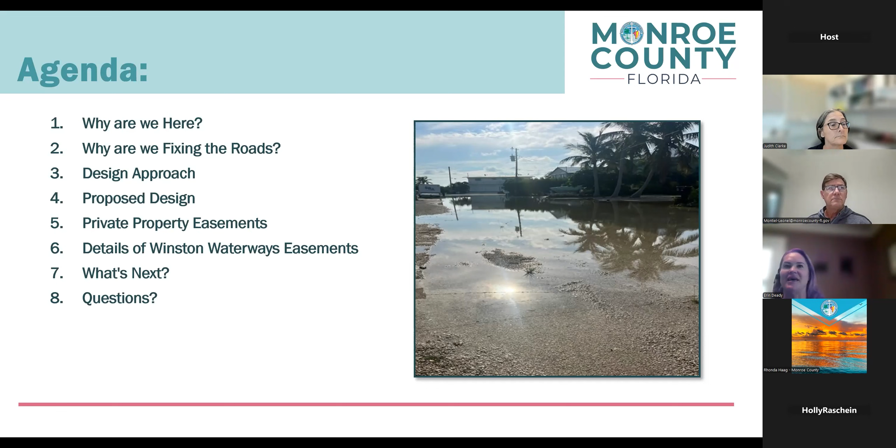We're going to provide a recap for those who attended our meeting in February, or if you did not, you'll get enough project information to have a basic understanding of what this road elevation project is about. We're going to discuss why we are fixing the roads in Monroe County, the design approach, and the proposed design for this project. We're going to discuss private property easements as applied to this project for the Winston Waterways road elevation, then what's next, and take your questions.

So why are we here? We know we're seeing different types of flooding impact different areas of the Keys. From a surface level standpoint, we're seeing more tidal flooding from increasing sea level rise, usually more pronounced in the fall, October, November, December, when we have higher high tides. We're also seeing increased groundwater, which is diminishing our ability to effectively drain the roads with the existing drainage systems based on gravity. So we are designing these road elevation projects to address these realities, the loss of drainage from groundwater and the increased surface water inundation on the roads.

The county has also secured federal and state funding to address these issues and pay for a significant part of the upfront capital cost of construction. The easements we're going to discuss this evening are necessary to get the permits to implement these projects.

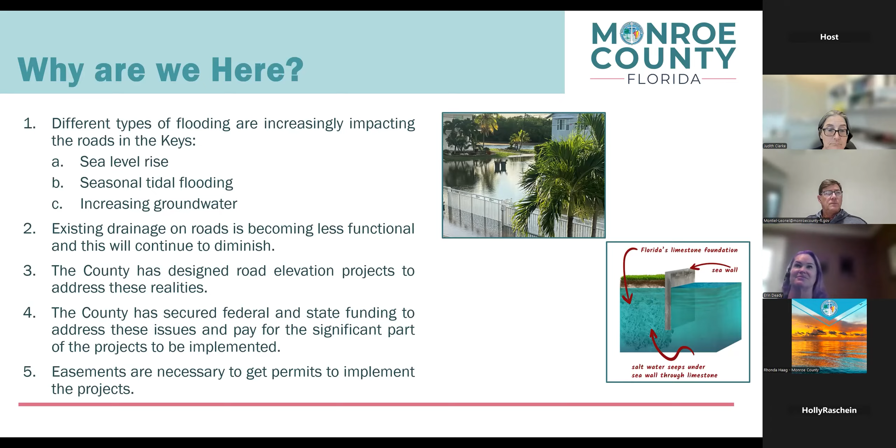So why are we fixing the roads? Monroe County has been at this for a while, developing and designing road elevation projects for certain key areas throughout the county to make the community more resilient to current and future flooding impacts that you're going to see more of over time. We're trying to proactively address those future flood risks while addressing the current flood risks and issues you're seeing now. These will worsen over time as we see increased tidal inundation and increased groundwater levels.

The benefit is that these projects will preserve access to your homes over the long term, increase the value of the homes and the desirability of the community to live there because you can get in and out with drier roads, and address the level of funding we've secured, over $51.5 million combined federal and state dollars. That money is likely not going to be available in the future, so we have to meet certain grant and permitting timelines and milestones to secure those dollars to begin construction of the project.

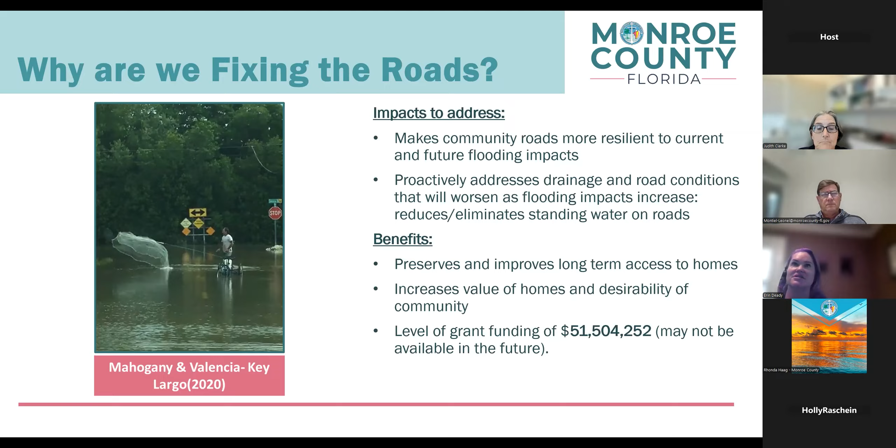I'm going to turn it over to my colleague now, Juliana, to talk about the design approach for the road elevation project and the drainage system.

All right, thank you, Erin. So Erin already went over the impacts we're seeing from sea level rise in your community. Now, to address sea level rise, the recommended solution is to elevate the roads to meet a minimum elevation of 2.26 NAVD. That elevation came from the 2045 projection directly from the vulnerability study Erin already mentioned. 17 roads amongst this community were identified.

As we raise the roads, we need to make sure we provide a smooth connection from the new elevated road to your homes and driveways. The process of connecting the elevated roads to the existing properties is called harmonization. When we design a project like this, we need to make sure we meet stormwater regulations.

One of the key regulations required in this project from South Florida Water Management District is that as we raise the road, we do not cause adverse impacts to the properties. Therefore, just raising the roads alone is not sufficient. That needs to be implemented along with a new drainage system. One cannot work without the other.

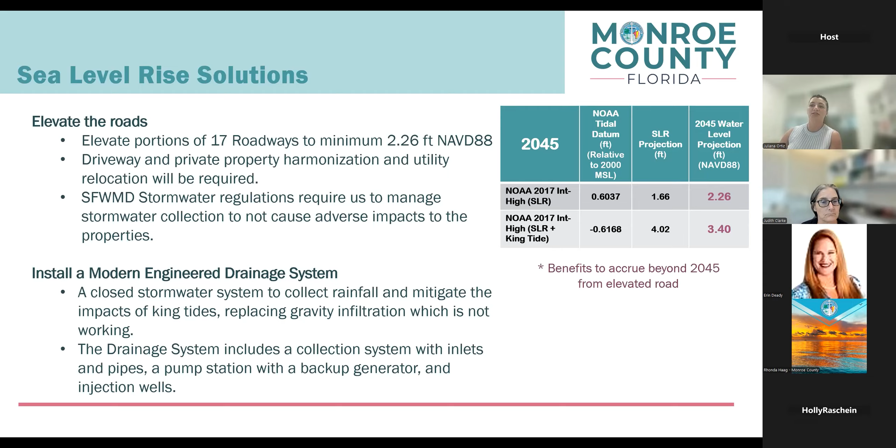The proposed design of this project: what you see here is a project layout. Here you see all the roads being impacted by the project. The map has been color-coded based on the elevation adjustment from the proposed 2.26 elevation previously discussed. The difference between that elevation and the existing elevation is why you see the different colors.

Red indicates the lowest lying areas, where the road will be raised higher than a foot—these are the areas with the greatest elevation difference. As we go down, orange shows elevation adjustments between half a foot to a foot, and yellow shows areas where the elevation change is between 0.01 and half a foot.

The areas in green are elevations that are already higher than the minimum required elevation, but were included to maintain connectivity to the drainage system. The blue square you see along Tamarind Road on the north side is where the pump station will be located.

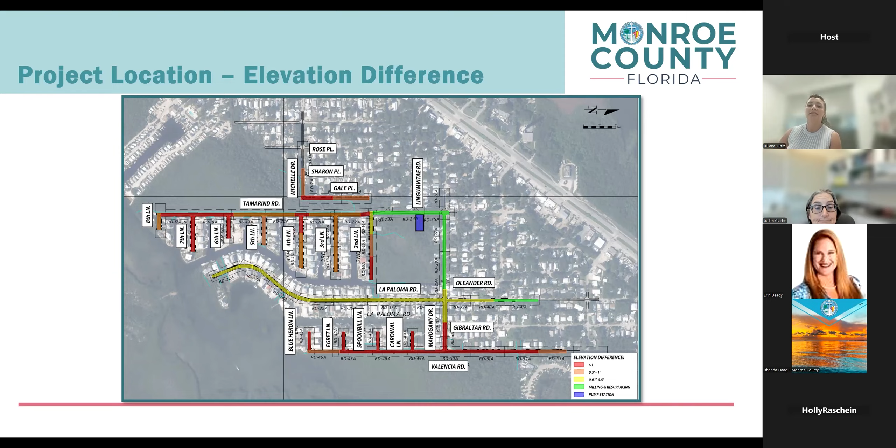The areas we will be talking about today are all part of the red areas approaching Valencia Road. That means these are areas that are currently very low in elevation.

Now I'm going to go over a plan and profile view. What you see here on top is a view of the road, specifically Spoonbill Lane, from above. All of the roads connecting to Valencia look very similar to this. The bottom view shows us the elevation difference, or the profile view—what you see in orange is the existing elevation, and what you see in blue is the new proposed road elevation.

As we get closer to Valencia, we're going to be raising the road close to 22 inches. That means that as we raise the road, we'll need to harmonize or connect to the existing properties. The two boxes you see in blue are areas where, as we connect down to the existing grade, we'll have to place some inlets.

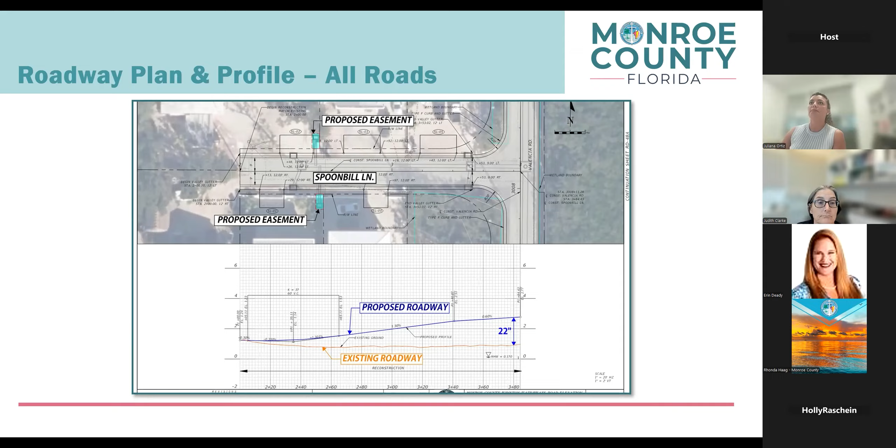This is a typical section of the roads I previously discussed that connect to Valencia Road. On all of these roads, you'll see valley gutter installed on both sides. The lanes we're providing will meet the criteria, requiring a 9-foot lane width. We're going to raise to meet the elevation of 2.26, and the stormwater will be collected within the right-of-way through the valley gutters, directed to inlets, and placed at low points.

I also want to point out that as we raise the road, we'll need to connect that proposed elevated road to the existing properties.

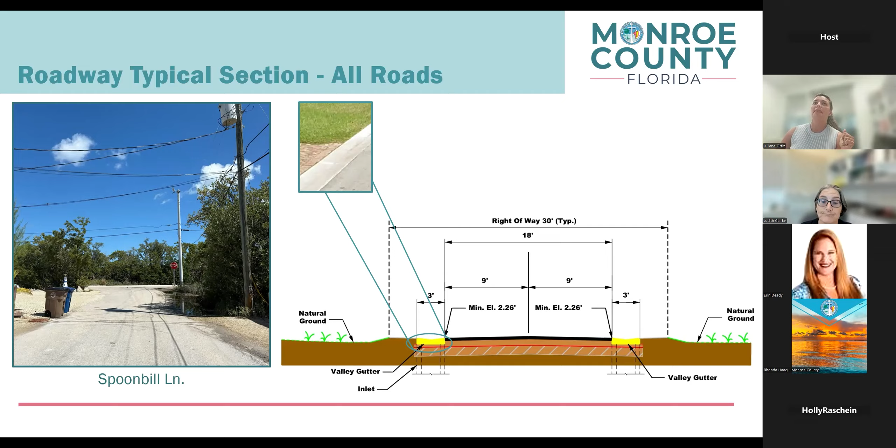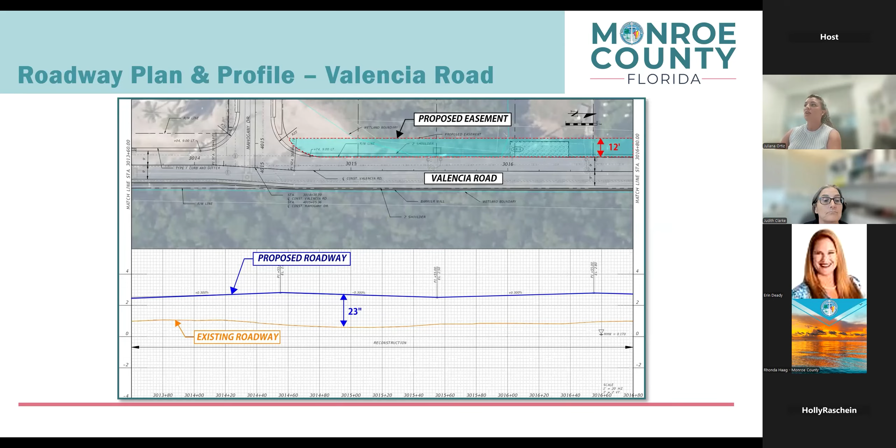This second typical section, or the second area we'll be talking about tonight, is on Valencia Road, specifically north of Mahogany. In this area we have a very skinny road—meaning the right-of-way or available space to construct varies between 15 and 20 feet. This is also one of the roads with the most significant elevation difference, about 23 inches.

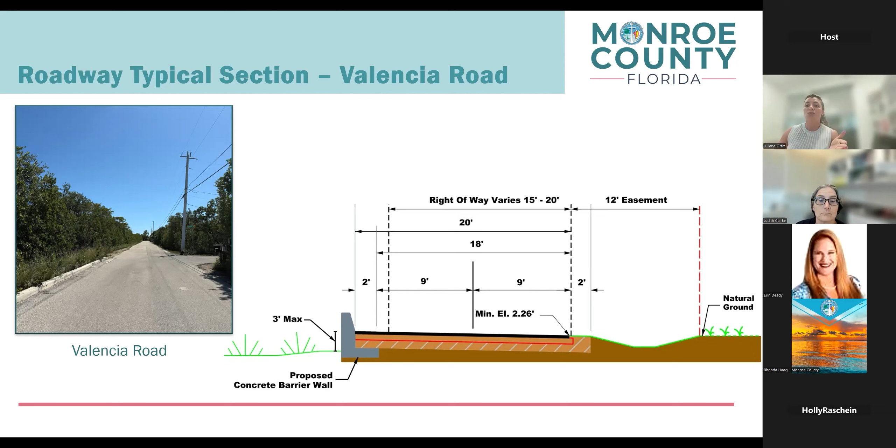I did mention that the right-of-way along this road is 15 to 20 feet. That means that in order to build the proposed improvements—not only the wider road but also the swale—we're going to need a 12-foot easement along that area.

Now I'm going to hand it over to Greg, who will talk about the stormwater management system. As Juliana mentioned, as we raise the roadway, we'll be adding an engineered stormwater management system throughout your community. The system's intended purpose is to collect rainfall runoff, but it will also help mitigate some king tide impacts as we move forward with the project. In this layout, the yellow lines are the gravity pipes that will be placed along the roadways, along with the pump station.

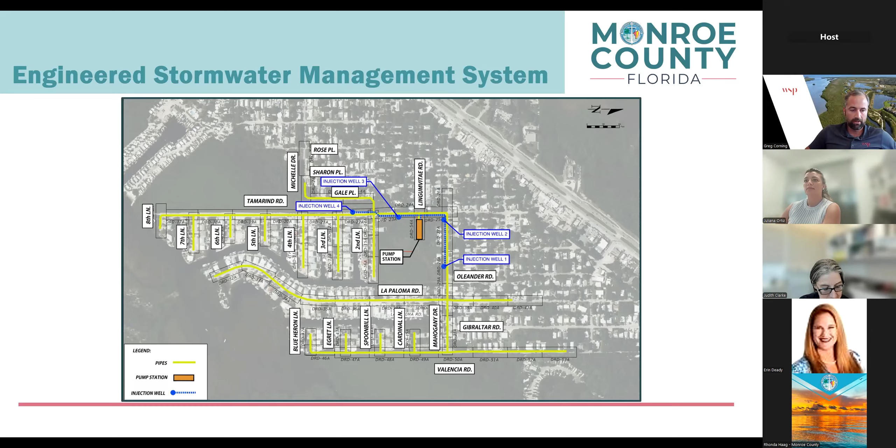If we go to the next slide, we're going to show you a plan and profile of that situation. Juliana talked to you about the roadway and the roadway inlets that are associated with it. That gravity pipe that I showed you in yellow is there in the center of the roadway. And then we have those property inlets.

That's really the conversation that we're talking about here tonight, which is the easements. The necessary portion of these easements are to ensure that we're not causing adverse impacts to your properties with the construction of this elevated road.

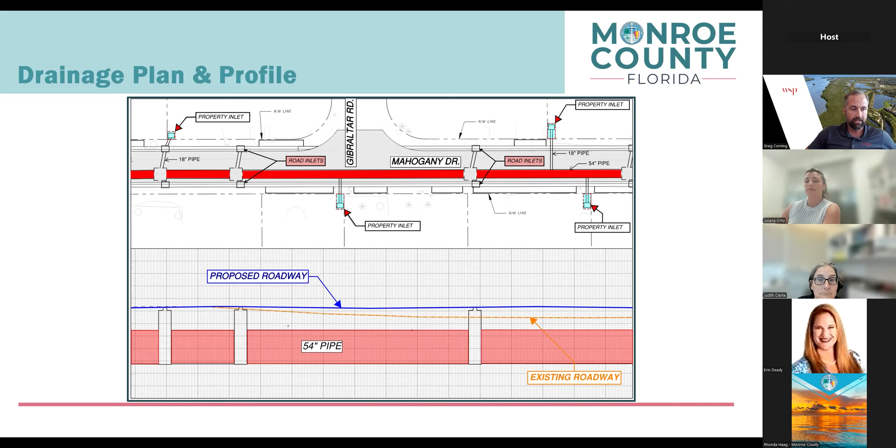If you go to the next slide, it's gonna help explain that situation. So if you see the green line, that's existing conditions, kind of what is happening today. You can see that some of the flows from your private properties are moving towards the center, which is the low point of the current roadway system. We should note that that is obviously not up to county standards, not meeting state regulations.

So as we now move forward into developing this project and elevating the road to mitigate the king tide and sea level rise impacts, we still have to account for flow that was coming from your private properties in order to not cause an adverse impact to your specific property. So that's the implementation of those inlets.

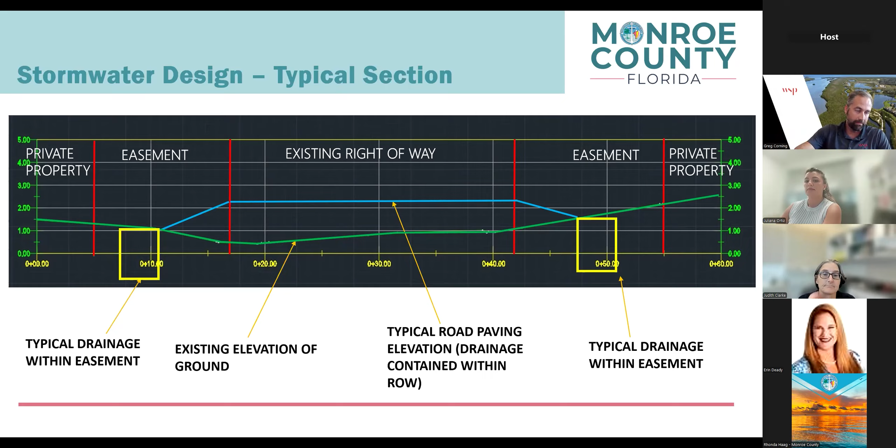And it's very important to note that that is a state regulatory requirement, not a requirement that comes from the county. It's saying that we cannot cause any additional flooding on your property as it is today as we implement the project tomorrow.

If you go to the next slide, we're going to talk a little bit more about those specific regulations and some of the details that we have to develop to ensure that we are meeting the South Florida Water Management District's permit in order to construct the project.

So when we develop the project, we develop two different models. We develop a pre-developed condition model, basically what's happening today, and then a post-condition model simulating what we're going to implement with that elevated roadway. And then we take into account all the different types of scenarios.

So we look at that groundwater table condition that Erin was talking about. We look at the rainfall runoff and the different storm events. All of those things get put into place so as to make sure that we're not causing any adverse impacts to your properties. Therefore, we had to implement the location of these specific inlets in your private properties, also with the swale along Valencia Road, to ensure that we're not causing those adverse impacts.

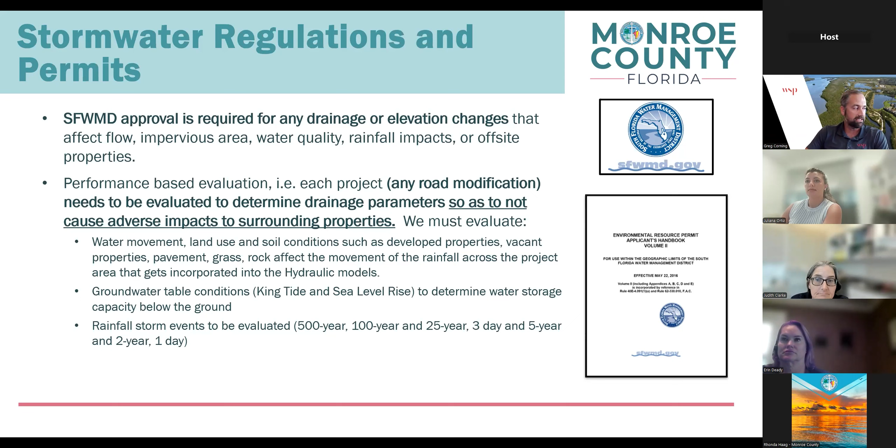To receive the permit. So now I'm going to turn it over to Erin, and she's going to talk to you about a little bit more on the easements.

Next slide, please. So what is an easement? It's an agreement, and in this circumstance, it's an agreement between the individual property owners and the county to provide permission to use the land, a limited area of the land, for a specific defined purpose while you still remain the owner of the land.

For the Winston Waterways Road Elevation and Stormwater Project, the county would be using the easement area to place and maintain the stormwater inlets or the swales that Greg previously discussed, and relocate existing utilities that potentially conflict with the proposed project improvements.

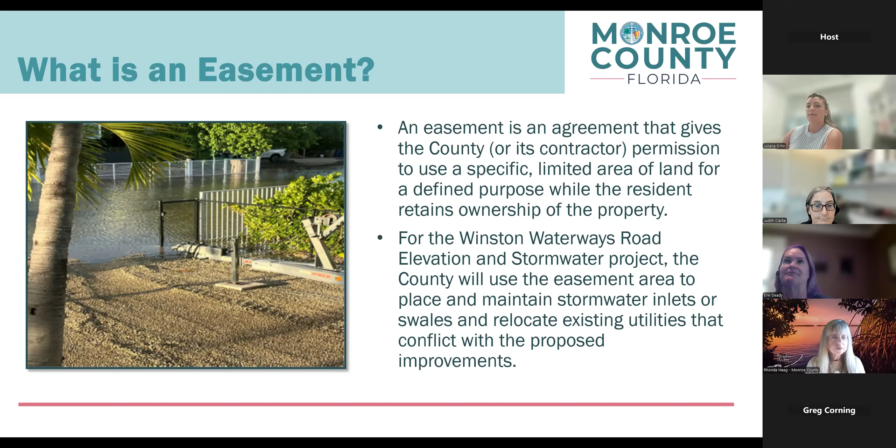So we discussed what an easement is, but for this project, there are two types of easements needed to implement it. One is a linear 12-foot easement, where the swale areas would be placed. The other type are two different sizes of isolated drainage easements, either 5x5 or 5x10, where those inlets will be placed.

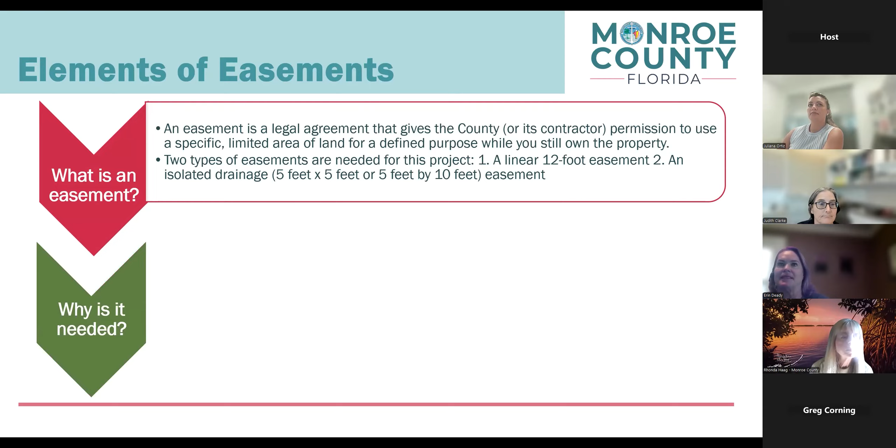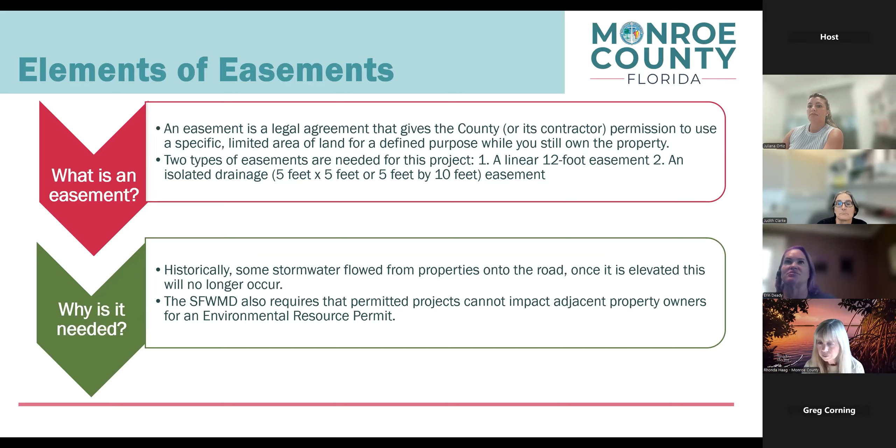Why is the easement needed? Well, as previously described, historically some of the storm water from the adjacent properties flowed onto the road. Once it's elevated, that flow of water cannot occur, so we are building drainage improvements to compensate. The South Florida Water Management District also requires that permitted projects can't impact adjacent property owners, so we have to put those drainage structures in place to make sure we're not creating adverse impact from the road elevation.

So what are the benefits of the easement? Quite simply put, without the easements, the project can't be completed. The road can't be elevated, and the current flooding you're seeing, and the future flooding we project you'll see more of, will not be addressed and will worsen over time. The property owners providing the easements will receive some level of flood protection benefit. Greg mentioned those areas where the road is going to be flush with the ground elevation—that's where the inlets will be placed, and that will provide that flood protection benefit.

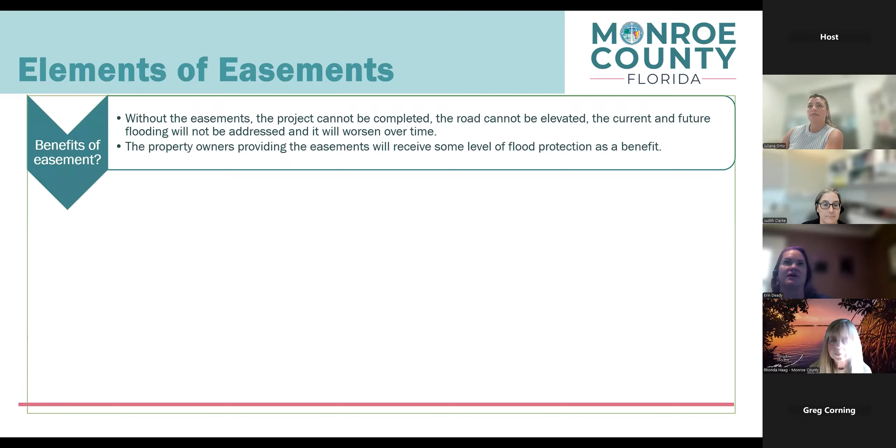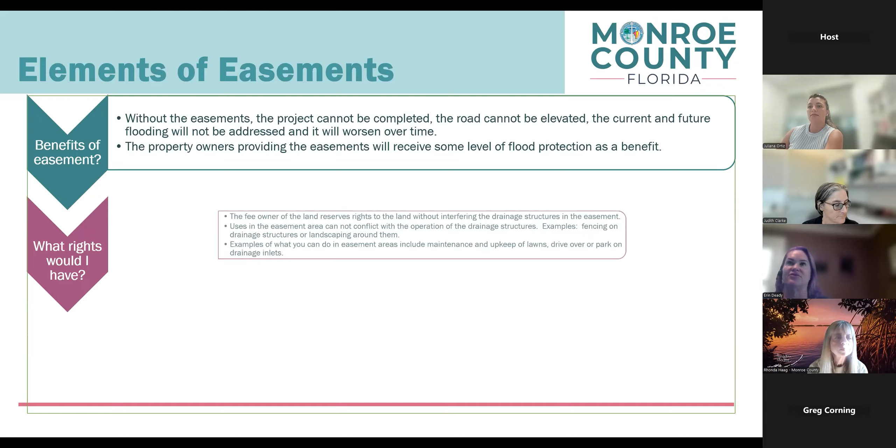And what rights would you have? This is an important issue, because the fee owner still reserves all right to the land, and you can use the land without interfering with these new drainage structures placed in the easement. So when we talk about uses that cannot conflict, we cannot impede the flow of water into those drainage structures. For instance, you can't place fencing or landscaping around the drainage structures that would impede the flow of water off the property into the drainage structure.

Examples of what you can do in the easement areas is also important. You can continue to maintain and upkeep the lawns. You can drive over the inlets. You can park on the drainage inlets. So there are certain activities that you will still be able to do within the easement area.

And what areas need the easements? As Greg discussed, they're at certain locations—where the raised roadway is going to meet the existing ground elevation, to capture and manage that runoff that was coming from the property onto the road that's not going to be able to flow that way anymore. So that's why we need the easements in the areas that we need them.

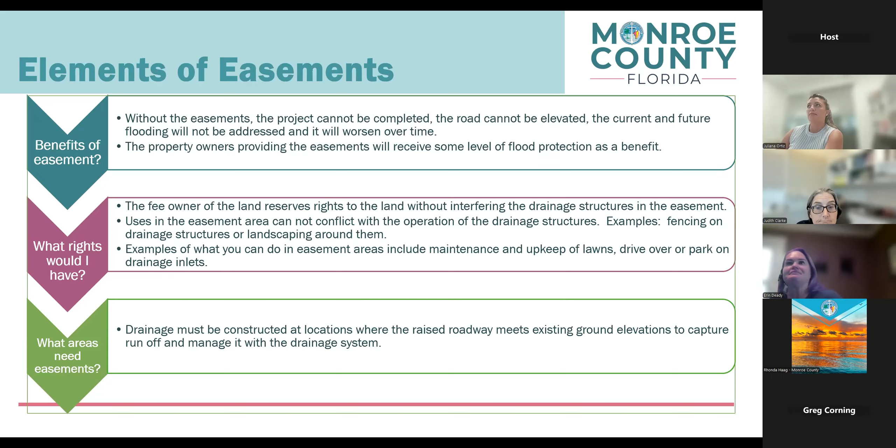The drainage easement, the 5x5 and 5x10—the roads where they're too narrow to harmonize or connect to the existing road, we'll need to place those stormwater inlets adjacent to the property lines. The roads where we're going to have this type of inlet are those connecting to Valencia Road, Blue Heron Lane, Egret Lane, Spoonbill Lane, Cardinal Lane, and Mahogany Drive east of La Paloma.

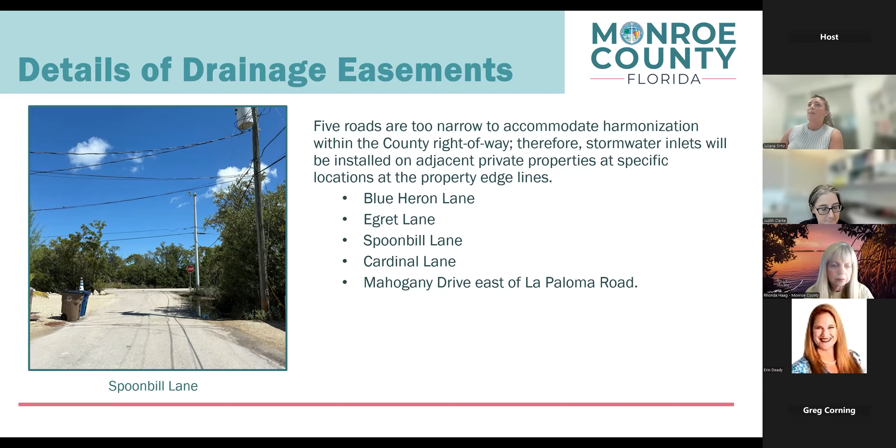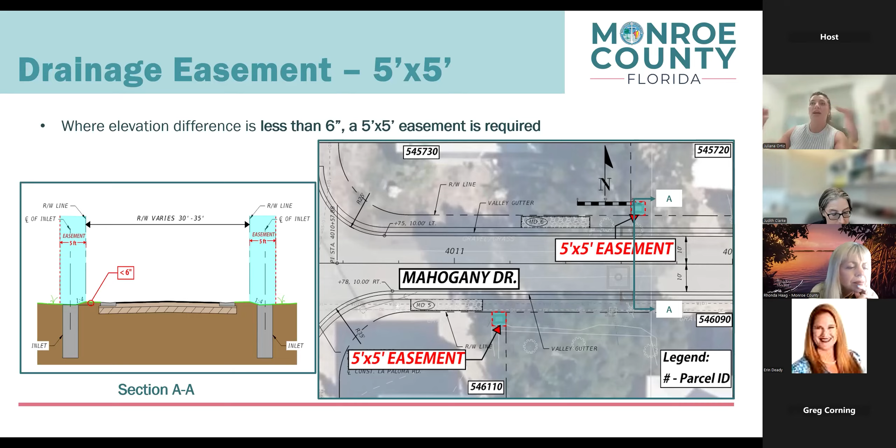There are two different sizes. While the inlet is the same size, there's a difference between the 5x5 and the 5x10. First, let's start with the 5x5. It's used in areas where the elevation difference between existing and proposed is less than 6 inches. So as we harmonize or reconnect, tying into the existing road, that slope is 1 to 4—1 foot of elevation for every 4 feet horizontally. We need to meet those slopes because there's already criteria for that. So as we connect to existing grade, the inlet is placed at the location where the tie-in or connection point meets the existing road.

The second type of easement you're going to see is still the same size inlet, but the reason we need a 5x10 is because the elevation difference at these specific locations is greater than 6 inches. As we go higher and connect with that required slope, the offset of the inlet from the property line is going to be further back than it was on the 5x5.

This is a good illustration of the two different types of easements. The one on the left is 5x5, and it will be placed at the property line. The other is 5x10, the same inlet, but further back.

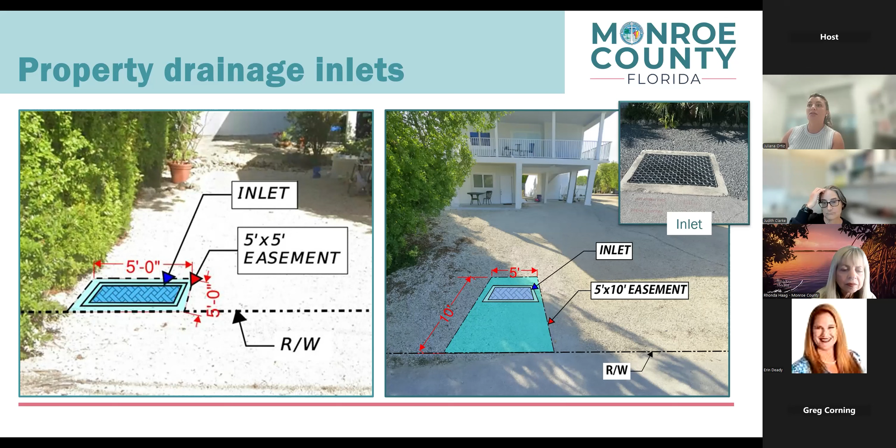There's a picture of what the inlet will look like on the top right of your screen. The only difference from this to what will be installed in your properties is that the inlet is not going to be right on the edge of the pavement. It's going to be at the property line, which is further back.

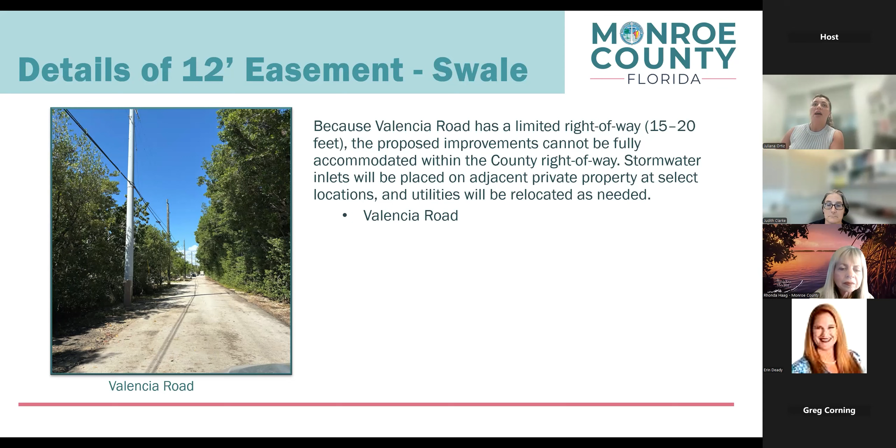Now I'm going to go over the details of the 12-foot easement. Valencia has very limited right-of-way, and we need to provide 9-foot lane widths that meet the criteria. We're going to widen the road and provide a swale or channel area that collects the water and directs it to the inlets placed at the bottom of this swale. This will only happen on Valencia Road, and as you see here, some utilities will also need to be relocated.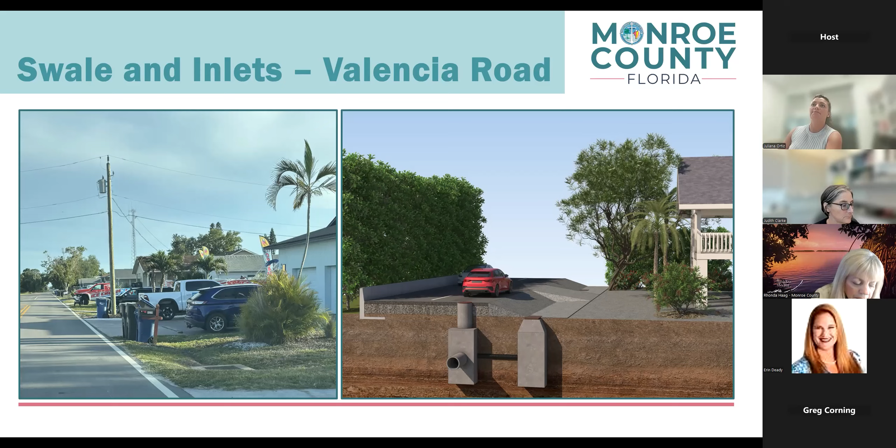The utility relocations I previously mentioned - you can see here on Valencia, there are some utility poles and utilities right next to the existing road. As we widen the road to provide the 9-foot lanes, those utilities are going to have to shift back. There's no intent to add new utilities or shift them horizontally - they're going to remain in the same place, just shifted back.

On average, there's between 2 to 5 feet that they need to shift back. It depends on how wide the road is, because there are areas where we have 20 feet, and as it gets narrower, we'll have to shift them back a little more.

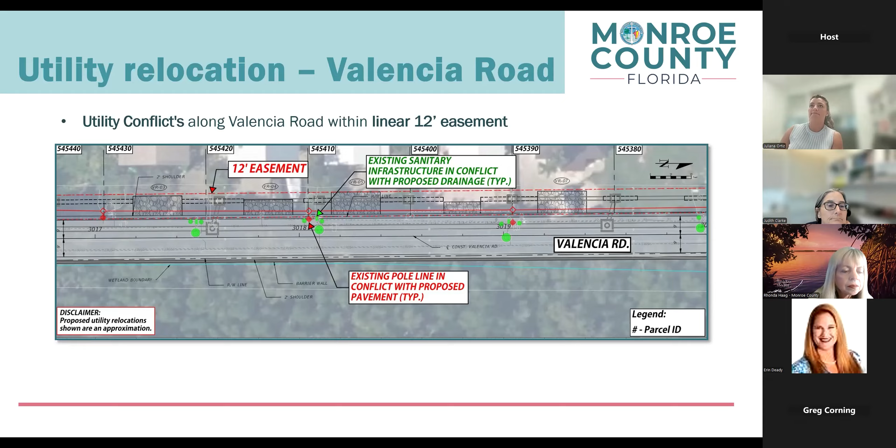Thank you, Juliana. So you've heard a lot tonight, a lot of information about the easements. So we wanted to give you a wrap up here before we get into the question and answer period, how this process is going to work.

So we sent the easements to you in the mail and by letter. We're asking for those to be re-signed and returned by May 1st. They will not be recorded formally. They will only be held by the county.

And then when we have enough of those easements to proceed, Judy will go ahead and wrap up the 100% design plans and permit applications, and submit those permit applications to the regulatory agencies: the Water Management District, Florida Department of Environmental Protection, and the U.S. Army Corps of Engineers.

While they're reviewing the permit applications and design plans, we are also going to submit the same set of plans to our granting agencies, the ones providing the grant funds — that's the Florida Division of Emergency Management at the state, and federal FEMA. They work together amongst themselves and conduct what's known as a benefit cost analysis.

So they look at all the different benefits that this project provides, and then measure it against the cost. And that's something that can take several weeks or even several months.

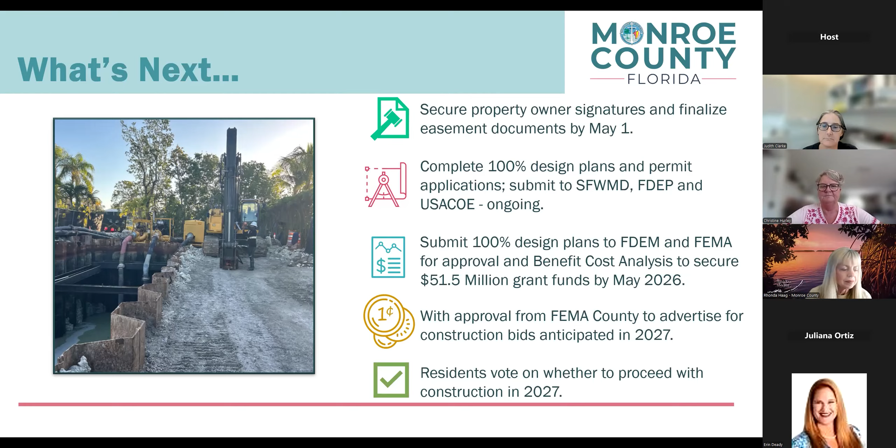And we all love the Florida Keys, and I appreciate all of you attending. Look forward to your questions. Thank you, Christine. All right, I think we're ready to move forward with questions.

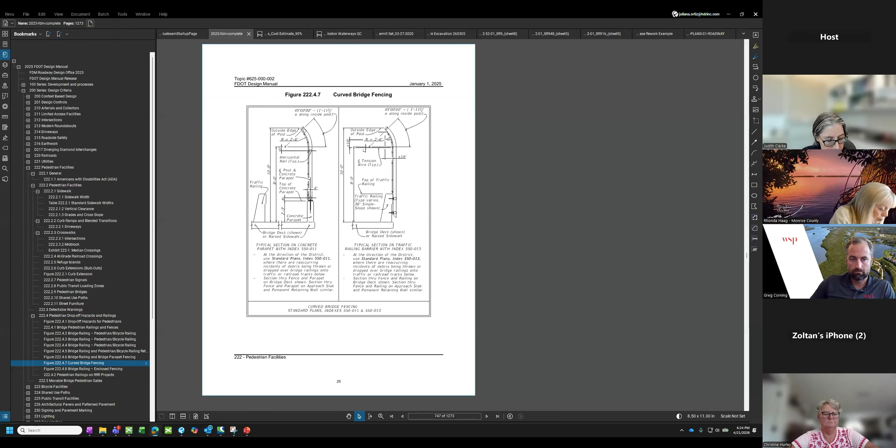I've lived here for quite some time. One of the beautiful things about living here is that we don't have the kind of nightmarish scenario where because someone trips over a rock that's in the county right-of-way, they can walk up and sue me. I'm sure in this day and age you can find a reason, but it's not so explicit like the sidewalks in New York, where if you don't shovel a public sidewalk in front of your house and someone slips on it, you get sued. Is this going to be like that?

And then, on top of that, are you going to change a lot of other things? And what fees, in addition to this upkeep cost you mentioned earlier, this $1,856 odd dollars a year, what additional fees are we going to be charged just to implement the construction, just to have this? So I think that's about it.

All right, so I'm going to jump in here, then we'll probably have somebody else come in to help me. First of all, did you get a letter in the mail saying we needed an easement on your property? I'm sorry, I'm going to bring it back. I thought you were done asking this question. I removed his permission to speak. That's okay, I'm going to go ahead. It's all right, it's okay.

I can go ahead. So if he didn't get a letter, we don't need any use of his property, so his property will stay as is. The only people we need use from on their property are the, what is it, like 27 people that we sent letters to, because we need easements on their property. And that's only to put in that inlet structure we showed you a picture of, and or the swale. That goes in either the 5 feet or the 10 feet that we talked about early in the program. So that's all that's going to be. You can continue, as Erin had said earlier, to use that.

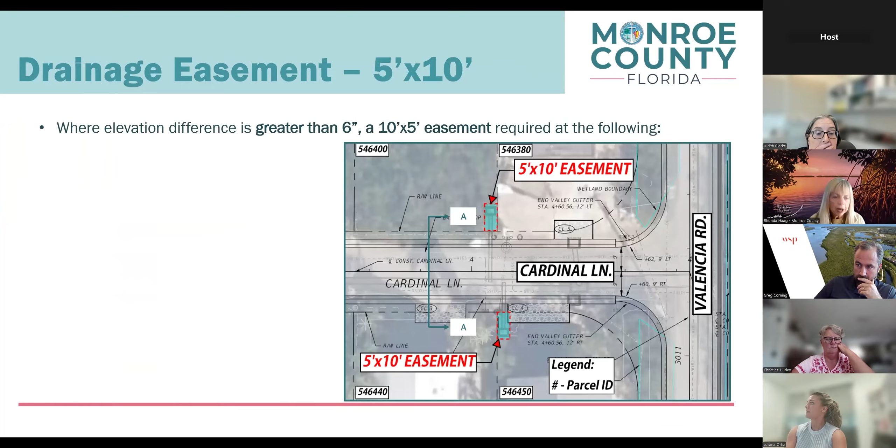You're going to get to vote. Everybody in the county, in the benefit area, will get to vote by formal methods and means, after our ordinance goes into effect, probably at the May board. We haven't worked that procedure out yet, but what we're anticipating is everybody's going to get a formal letter in the mail to vote. If one property gets one letter, you'll sign it and send it back or bring it in, and 50% plus one person of the people in the project benefiting area has to vote in favor of this project for it to be a yes vote.

We're going to work very hard to ensure everyone votes. We don't count the number based on responses, we count based on the actual number of property owners. So if even 50% don't respond, that's automatically going to fail, because we need 50% plus one of the total population to vote yes. And again, no eminent domain - this is all voluntary.

I think you had a question about modeling the stormwater versus the tidal water, and I don't know if Greg or Juliana want to jump in about that. I'm not sure, I didn't catch that question, Rhonda. I can explain the modeling process if you'd like, but I don't remember a specific question. That's okay, he can come back on and raise his hand. I hope that wasn't too long of an answer.

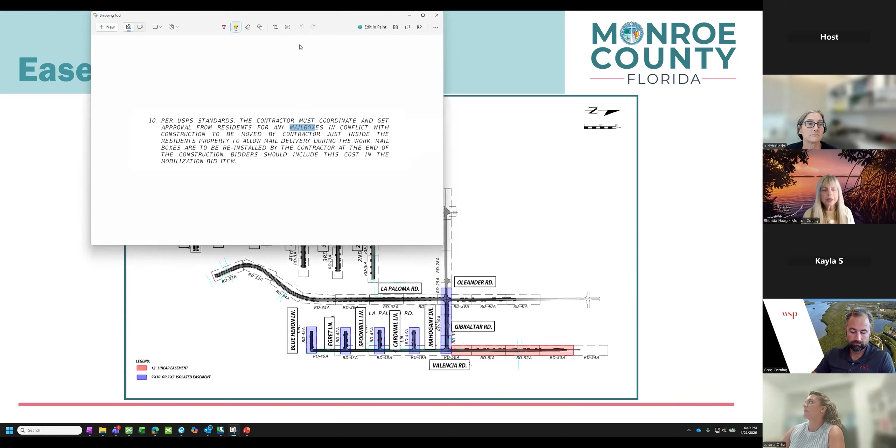Now, we're not going to just dump you between now and then, like you're not going to hear from us. We can certainly have more meetings in between to help bring other residents up to speed with the same level of knowledge. I know we have a lot of new people tonight who haven't heard any of this before, so I understand your questions and concerns, and we can have more meetings, even at the county center over at the Murray Nelson Center if you like. We want to make sure we have a very engaged neighborhood.

Now, if 50% of the population doesn't vote, that's going to automatically stop the project, because we need 50% plus one people to vote yes.

As far as being notified, you mentioned being notified. We were barely notified on this meeting. I just want to bring that to light as well. We were not notified on this meeting. The reason we found out about it is actually a homeowner here put a paper in our mailbox. So I just want to bring that to light as well. I could guarantee you 90% of the homeowners here are not aware of this.

Right, so the people we really focused on this evening were the people we sent letters to, I forget how many there were, like 27 of them, I think. We didn't send them to everybody in the project area because we wanted to focus specifically on the people who we need an easement from. We wanted to be able to bring up maps and look at people's individual houses if necessary, and answer their very individual questions regarding the easements. We're happy to answer all the rest of the questions, but there will be more meetings where everybody is invited, where we can answer the more general questions, like about the assessments and all of that. So you'll be hearing from us again. But that's why you didn't get the invitation. Sorry to cut you off there.

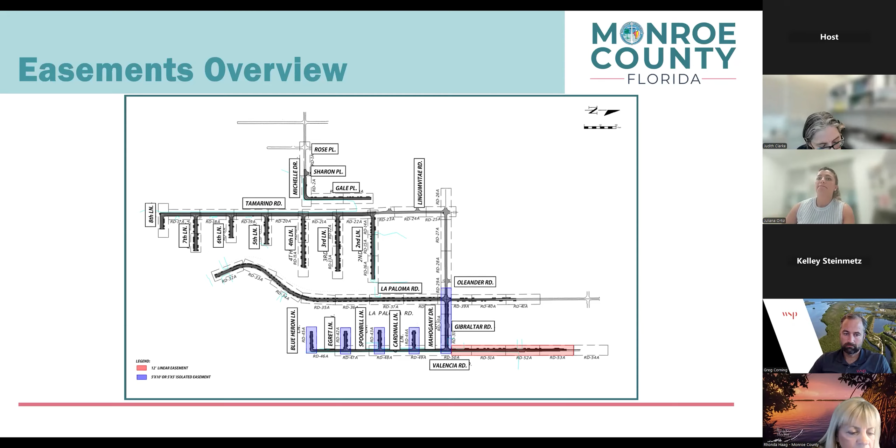Yes, it's in reference to the easement. And I spoke earlier, I live on Valencia, own a home on Valencia, and we have not received a letter or any form of communication about the easement. Was it sent out certified mail? What is your address on Valencia? It's 1045. You are further north than the project.

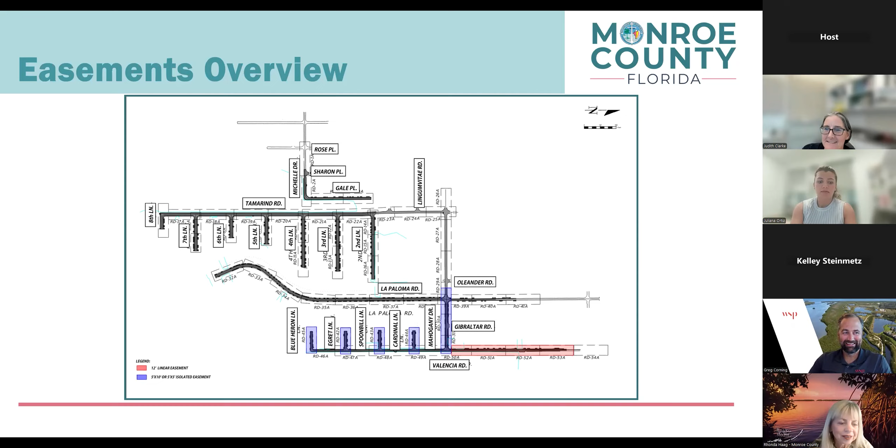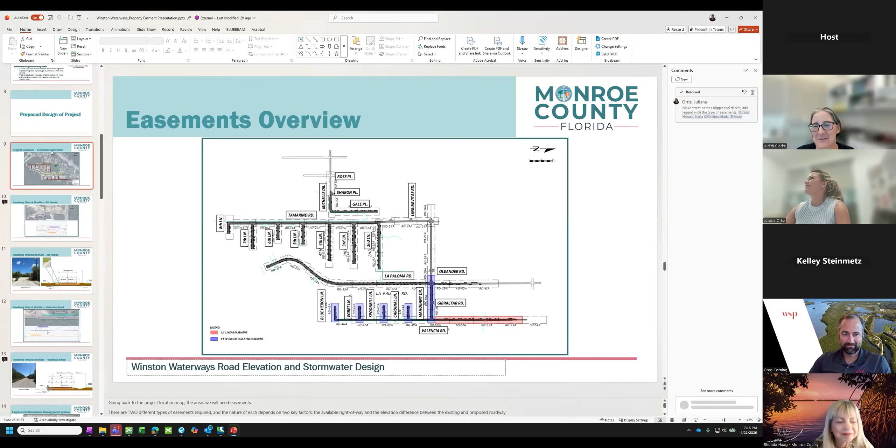According to the map here, that's very difficult to determine. So I appreciate that. That's why you did not receive a letter, because we don't need anything from you. Okay, let me give you some advice - with your map, maybe you can put the end address on the end of Valencia or something like that, because it's very, very difficult to determine where that red line stops. Understood. 1035 is the northernmost parcel in the project.

So real quick, still, if we're not in the project, we're not charged for the project. No, sir. Okay, that's - you've clarified a lot for me. Thank you. You're welcome.

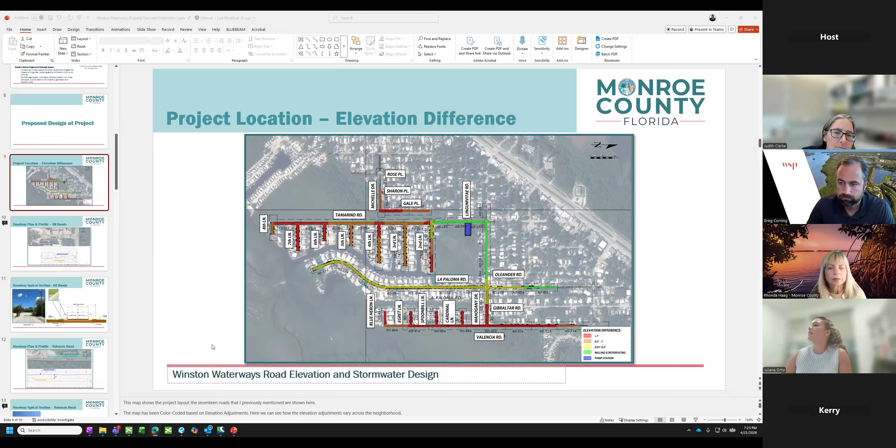Part of the reason why the road needs to be widened is, well, when we resurface a road, address a road, we need to bring it up to the current standards.

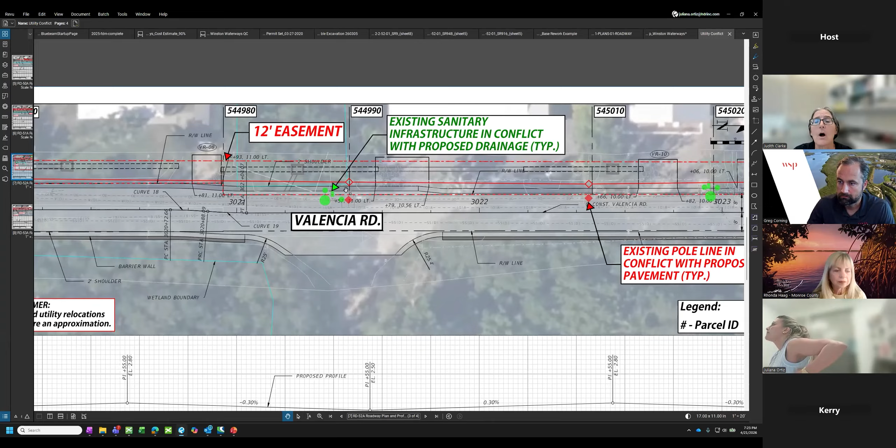But yes, that's not my question. That's not my question. My question is, are you going to widen the entire Valencia Road, including Eric Simon's property at the stop sign on the corner? He's been there forever. Okay, answer that question.

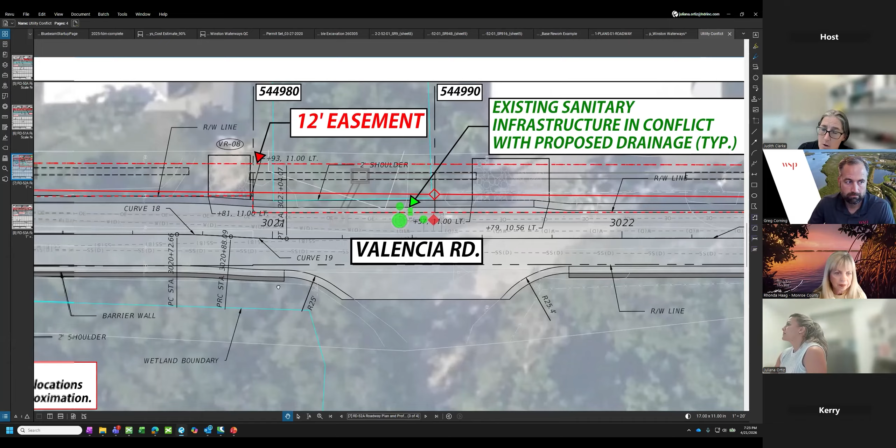Another part of the reason why we have to widen it is we're putting a barrier wall around the lower part, so that if two cars meet, there will no longer be the ability to move over. So the road north of the project area is not currently scheduled to be widened, but we will address that. Right here, where the state Pennekamp mangroves are in front of me, which I don't want cut down, but I would say that would make more sense.

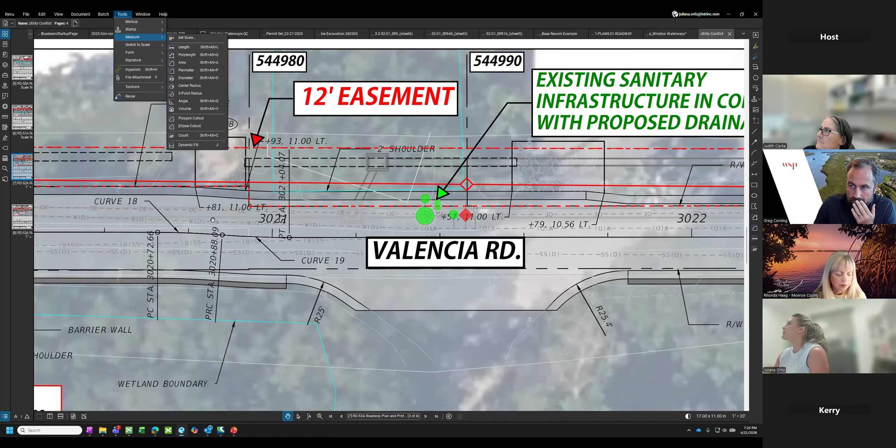You're saying the 3 last houses on this street going north, we're going to have to try to figure out where to go? It doesn't make any sense. And then the other question is, where will this telephone pole land in my yard? What part of it will be in the easement? Because it'll be a road now, and they're not going to leave a telephone pole in the middle of the road. So how many feet are we actually moving the telephone pole towards my home?

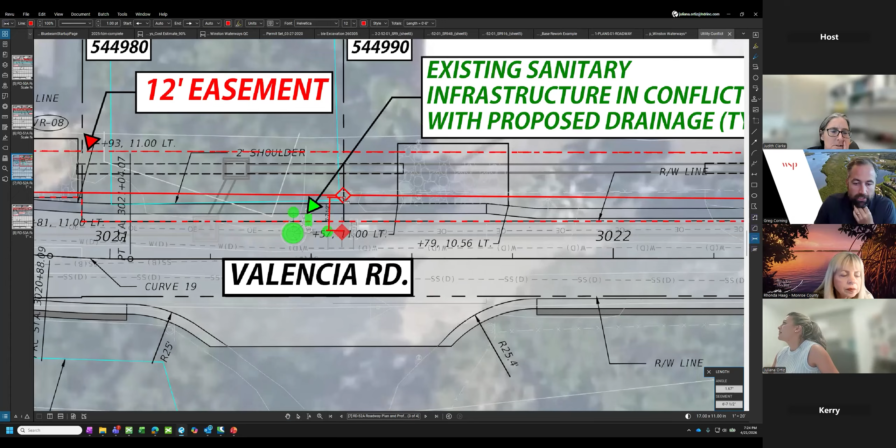John, I hope you're listening. And Juliana, I'm not sure you're in the right spot. It's at right.

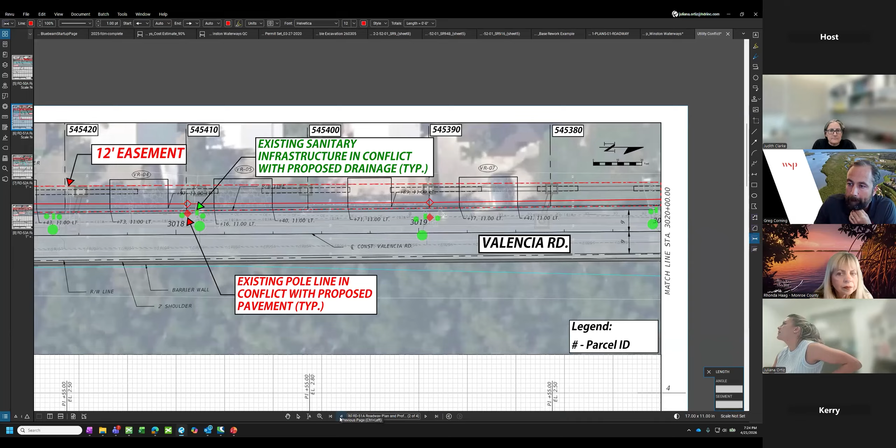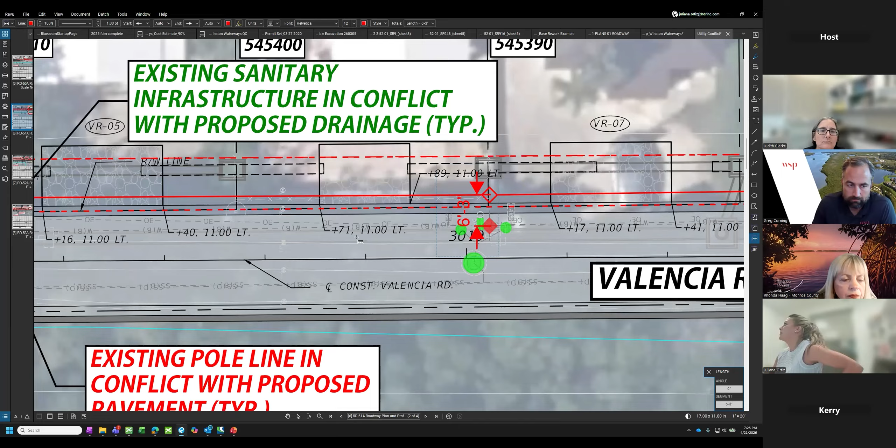About 6 feet back. So right in my yard? Correct? Yes, correct. So my fence has to come down, my mailbox has to come down, my sewer has to come out, my electric has to come out, my water has to come out, my pavers have to come up. Everything has to move. And who's going to pay for that?

Sure, it's probably going to be me. Right. The utilities will be relocated as part of the project.

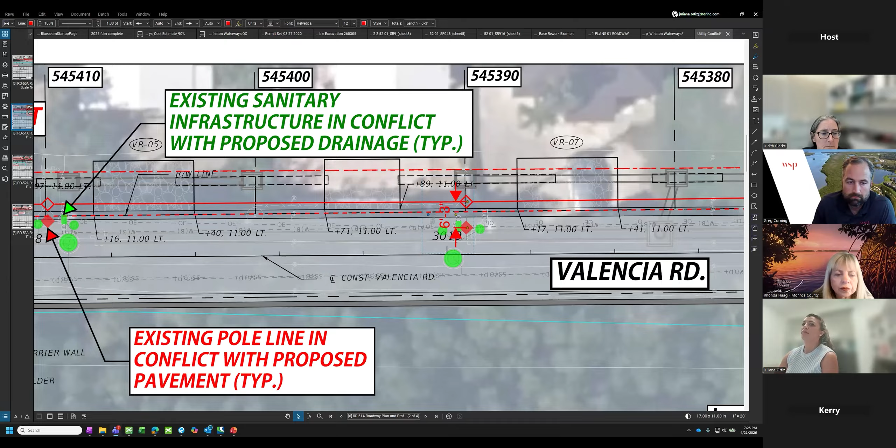Yeah, okay, so who's going to take the fencing out to put your road there? John, you hear that? It's not 2 feet. He asked a different question. I believe he asked - he's on the same road, one house down. He asked elevation, like how high the road was, not more things are moving. Or, no, he asked how many feet into the property the easement is going to go.

The asphalt would be 2 feet. The property line, the county right of way is here. So technically, at your property, we're not adding pavement, because the pavement ends here. But we do have to relocate the pole behind the new asphalt. But... And you have to move my fence.

Juliana, can you let me share this screen? Juliana, can you stop sharing for a second? You can take over. I think you have to end it. Okay, give me 1 second. Let me stop sharing. Stop share. Okay, oh there we go.

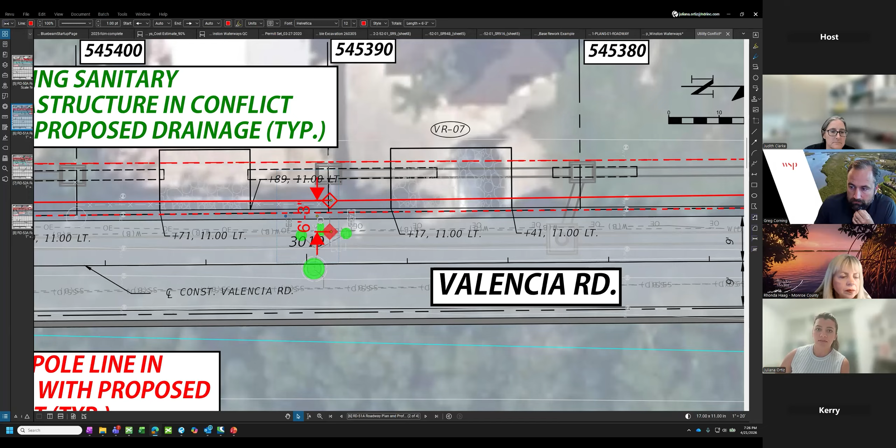Take over. Yeah, so I think what she's asking is - this is her property, so she has a fence here, and then the gate, and then the existing sewer, and then the electric pole. So Kerry, I guess to answer your question, as Juliana mentioned, it's going to be 6 feet. So the pole will be right on approximately my fence, right here where it is. So then we're going to have to move your fence back. The fence is going to have to move back.

And Juliana, based on the dimensions, tell me where the end of - if we're 6 feet, I'm doing the dimensions on the fly here to show you exactly where potentially your fence will have to go back to. So probably your fence will be about right here where my mouse is, and cut back here, because then your swale, if I draw the line here for you, just for purposes, you're going to basically have this retaining wall that's going to go along here.

You're going to have a road that's going to slope down into my property? Down into your right of way here, and then what you're going to have is a shallow swale, and then that shallow swale will come up, and obviously - so when I pull out my lowrider truck that I drive normally, I have a lowrider truck that's an inch from the ground. Are you going to pay for the damages?

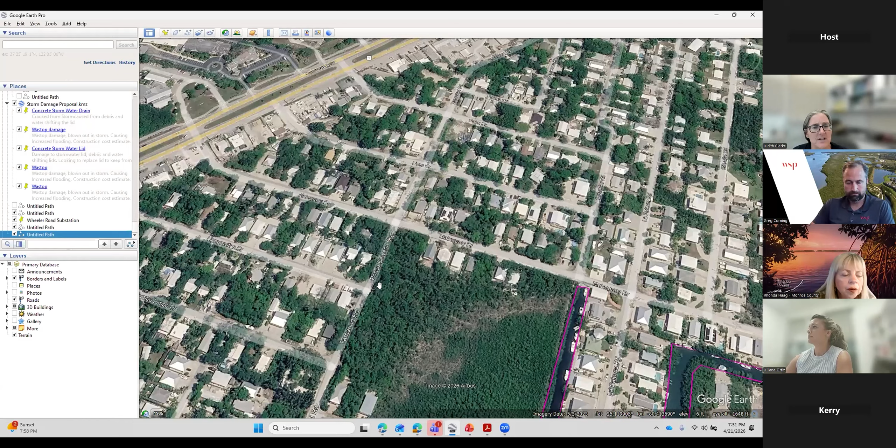Right here, yeah, that's a wetland, no? No, not on that side. Is that on Lignum Vitae? That's Lignum Vitae, the undeveloped part. Yeah, he lives over here. His property was, I believe, this one here, which he's not even in the project limits as Judy mentioned, so he's not part of the project. The pump station is going to be over here.

Are you guys letting the people know that live right across from that pump station that they'll have a pump station located across from their home? Will they get a note or a letter? They're in the project limits. If they're in the project limits, they will get notified and have been a part of the process.

Is that part of the project limits where you're putting the pump station? Are the two houses across the street part of it? I believe this little intersection is, yes, but I don't recall it off the top of my head. Okay, thank you. You're welcome.

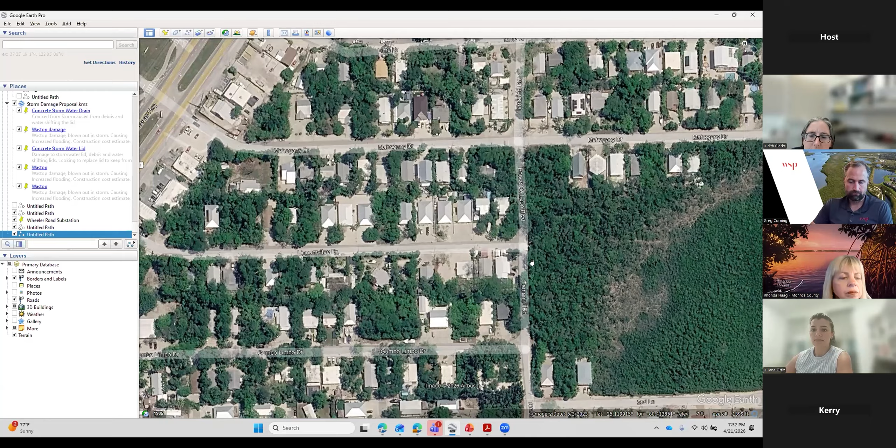Trying to look through the questions, scroll through to see if there's anything on there, about easements. We can go through those, and we have emails, and we can address any other questions.

I just want to say again, this meeting was only for easements. It doesn't mean we can't have another meeting with everybody. We can notify everybody by letter, we can have another meeting. What we need to do immediately is try to get through this easement process and get as many easements as we can, so we can move the project along. But we definitely will have another meeting, at least one more if not more, with all the residents, and we can hand walk around flyers.

We were working with a couple of residents there, Jack Cardis was one, and I believe another one. I thought you guys had an internal website where information was being posted. Maybe that's not accurate anymore, but we were trying to work with as many people as we knew. We just didn't have contact information for a lot of you.

So when we do it next time, we're going to reach out to all of you with emails, and we'll forward around the meeting notices, and we'll have more meetings to talk to you. The final vote will definitely be by letter in the mail. Everyone will get one, you'll probably get two. We'll mail one to the property address at the property appraiser's office, and one to the local address.